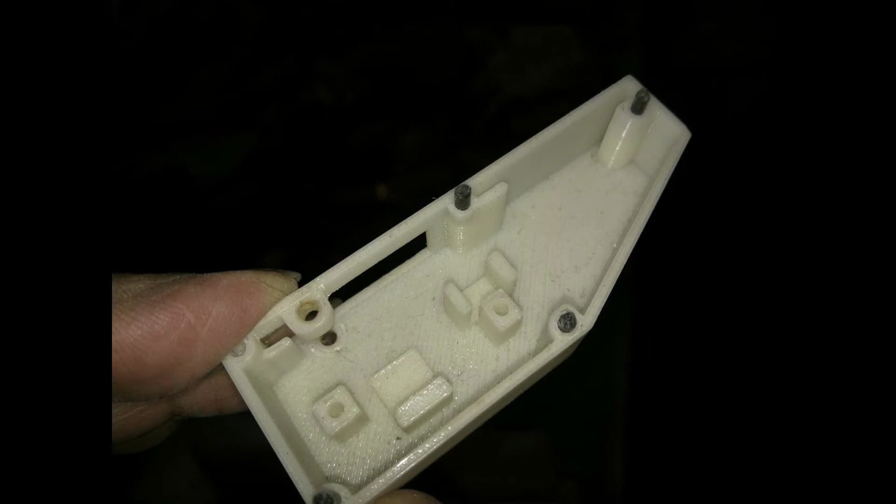Now, if you look at my slide presented here, you see often somebody had to produce these parts which are generally made by injection molding. Such things were not possible to be made by hand or with the available known resources. Here we have beautiful industrial looking prototypes.

Now, this is where I feel this particular course was a godsend, that we now have what is loosely called 3D printing. Actually, this 3D printing issue is more related to how to make rapid prototyping, so that when production comes in place there are no surprises and we have the part exactly like that.

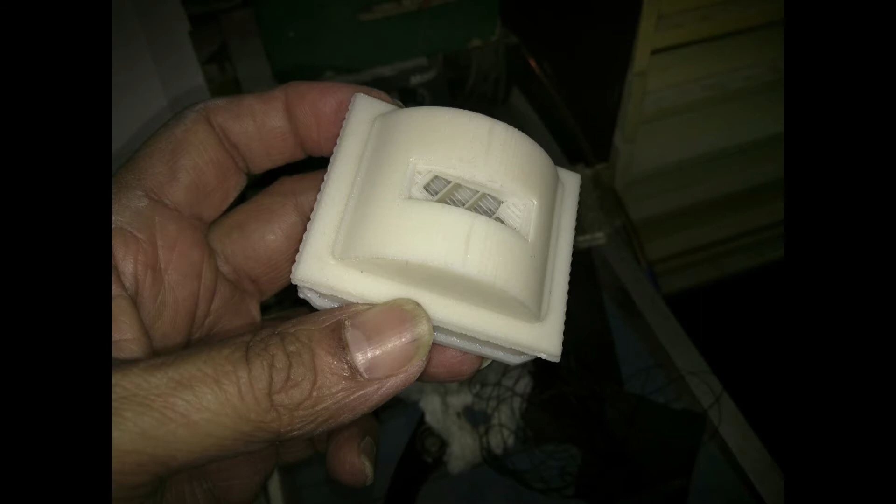And there is a special part here, this one is a holder for a Fresnel lens. This Fresnel lens holder has the advantage of having any radius we like, which we need to change frequently until we get the correct thing.

What is not known too much about the rapid prototyping procedure is that while it looks easy to produce these parts, a tremendous amount of design has to go into that.

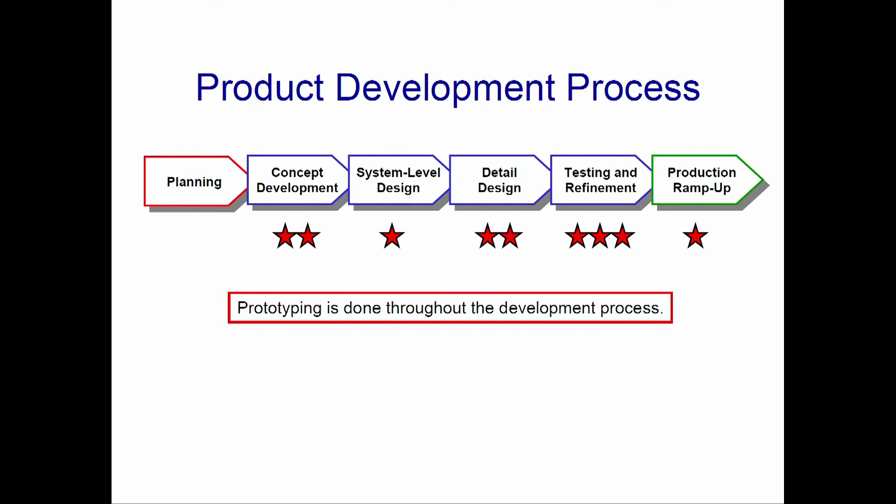So, I will now go to one or two small prototypes. You see here the product development process involves prototyping done throughout the development process, in the concept development, system design, and so on.

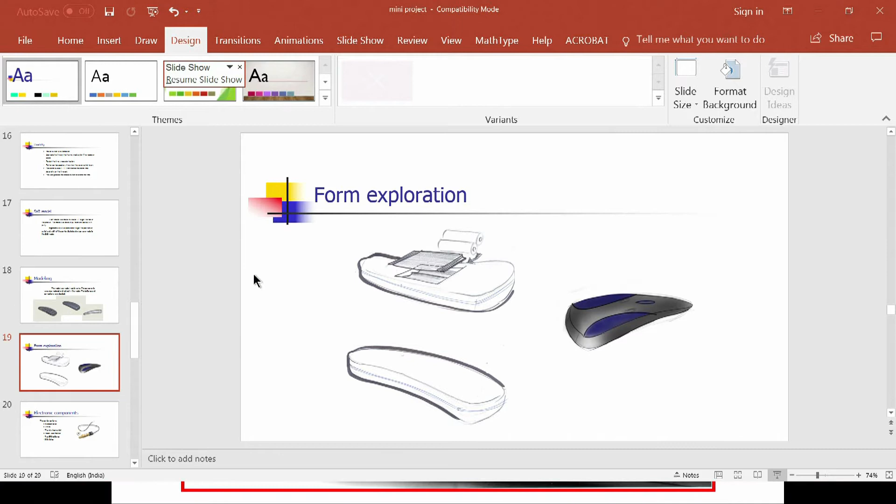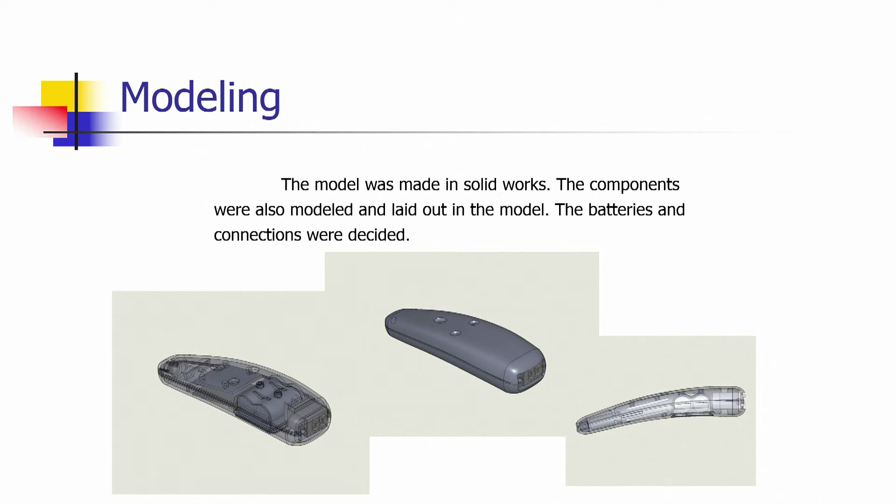So, how these things come, and finally there is a little bit of CAD modeling, and this is done by SolidWorks, and we have tools from Siemens as well.

So, I thought I would help you along a little by showing you things from the internet, also saying are there design rules. See here what it looks like. We have a beautiful set of design rules for 3D printing.

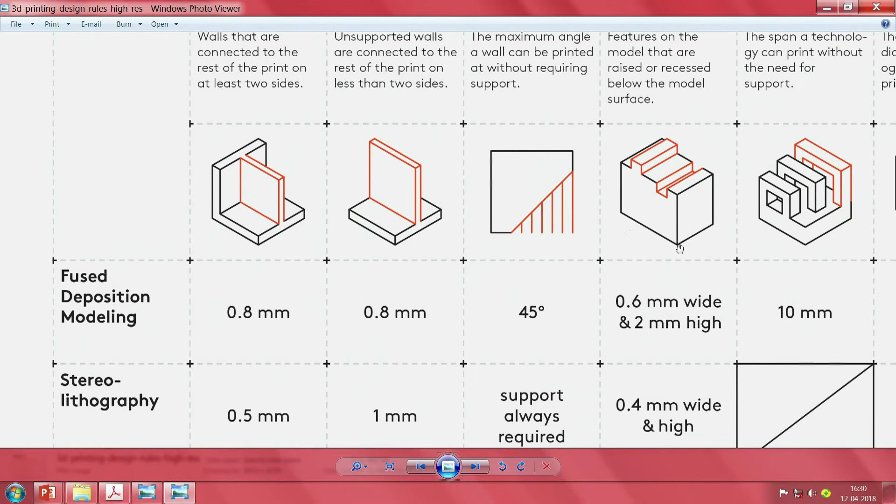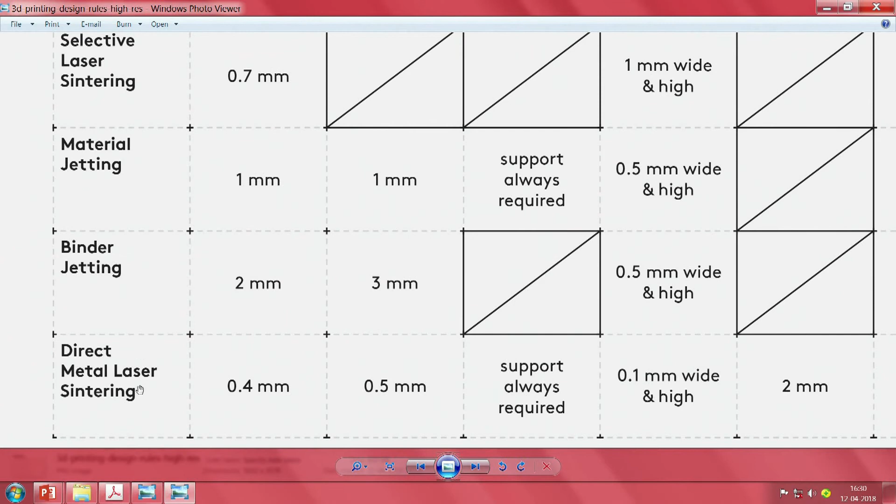This is available on the internet, there is no problem, but a tremendous amount of it still requires thinking about how to detail these things, and it is not as if all 3D printing is the same. So, we have several methods like fused deposition modeling, stereolithography, selective laser sintering, material jetting, binder jetting, and direct metal laser sintering, by which complicated objects can be produced. So, using all these things in mind,

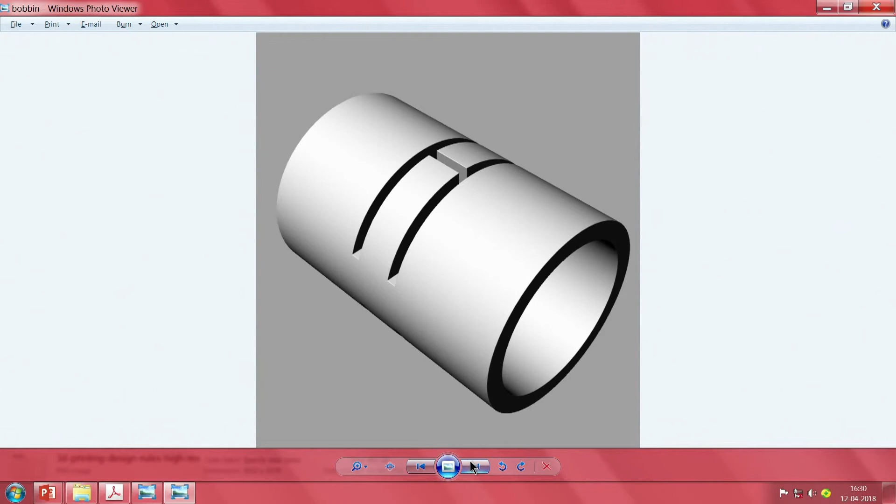when you try to produce parts like this, often we end up with peculiarities which are different from the original thing, which are not easily realizable.

Where it helps most is when you want to talk with your peers working with you in the group. Earlier it was almost all about design, like if you are an electronics engineer, you will try hard to make the best compact electronics, and then you tell them, I want something - this is called a cell phone, and it is very easy, it has 6 antennas, unbelievable. Nobody would have thought we could pack in 6 antennas, and as if that is not sufficient, we also have a camera, then lighting, then another camera.

Now, the latest ones have 2 cameras at the back. All this - while the electronics part is reasonably understood, how to make an enclosure for it which is reliable is still part art, part practice, part science.

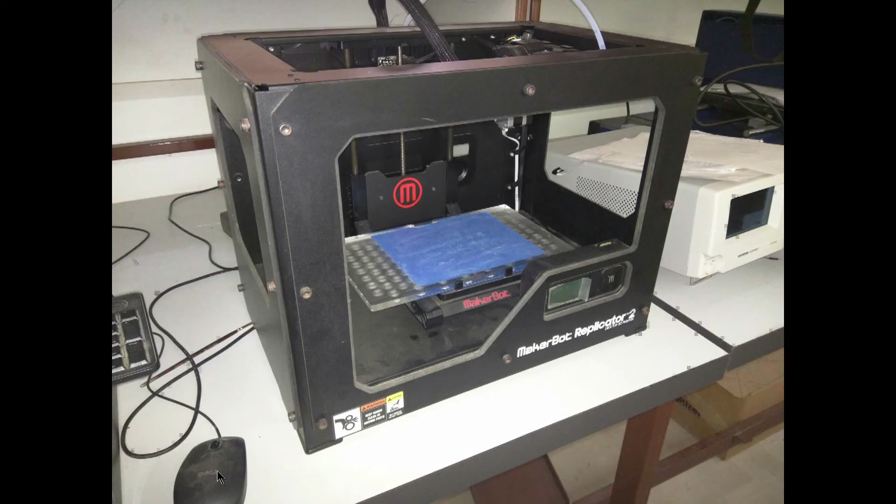All of them - actually, these are the people, MakerBot, who started saying you need not go anywhere, sit at home and do it. And you see here, there is a calibration device - it is not a copy thing, it is a scanner. If you have a part, you scan it, and then I can clone it. So we have all these beautiful pictures, and then anything we want, we can make with it, but the core of it is just about the same.

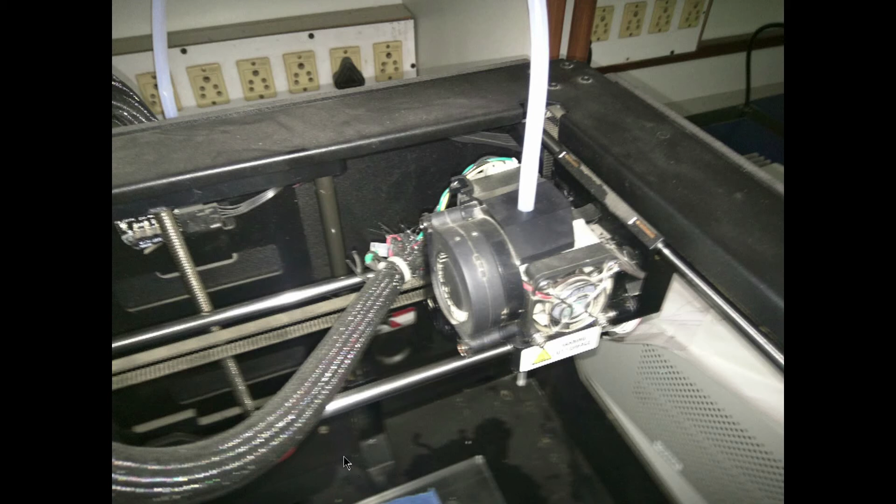We have here this printing head, and it is relatively easy - to the extent that you can probably modify any XY table to make it into a 3D printer. So, some students have been working on this, and it is not as if the technology is all original, this is old.

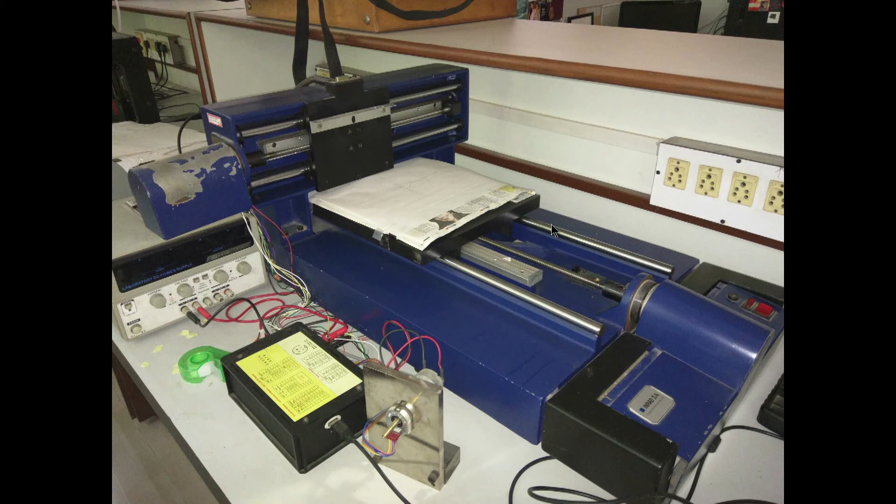This one is something which prints negatives, okay.

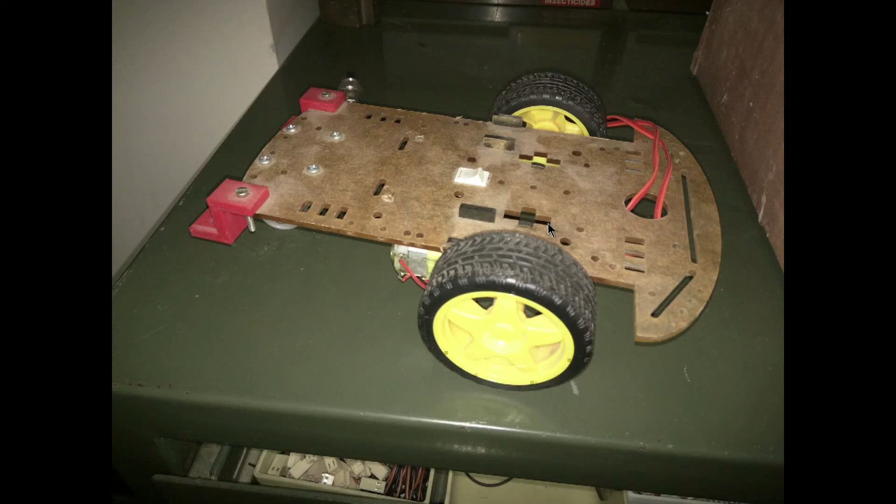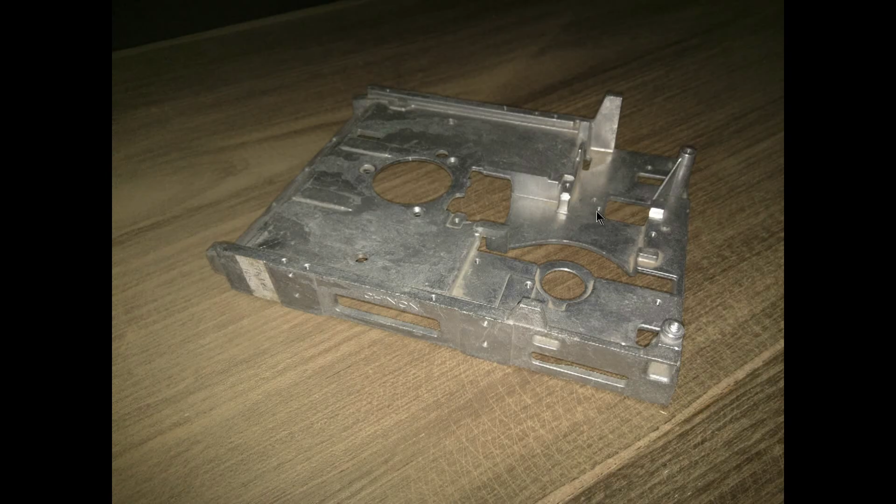So, we have all these beautiful devices, and I am sure all of you would have played with this car, except you see the chassis - that chassis is made with an acrylic sheet in which various slots are cut. This is very much possible for you, and the whole thing is assembled in parts. Right now it is very much possible for you to print the whole thing, and then even things like - I think you know what it is - it is taken from an old floppy drive, it is an aluminum casting.

So, the thing is, the rules for them are not the same. Thank you - I feel you should join us, you will benefit if you have access to a machine directly on your desktop. Alternatively, right now you can post your file to somebody via email or anything and the printed part comes back, and depending on how well you are connected, if you send it on Friday while you enjoy the Friday evening party dressing, Monday morning your job is delivered - it is on your table and you can play with it.